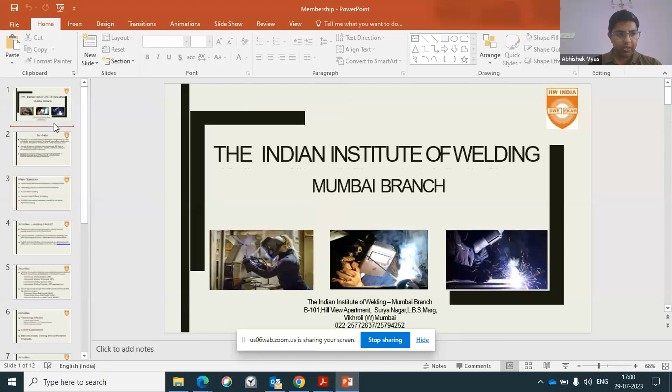Abhishek, now you are the host. Okay Abhishek, you are host now. After completion, hand over to Sanjay. Okay, I'm just okay. Just give me a minute. I hope you can see the screen, Sachin. Yes, we can see you. The slideshow mode, yeah.

Okay, so a warm good evening to all of you, all the participants and everyone joining us today for this webinar, Weld Tech Talk. I am Abhishek Vyas. I am representing as the Honorary Secretary of the IIW Mumbai branch.

I will just take you a little bit about the Indian Institute of Welding as a whole and what about the Mumbai branch activities. As you may be attending this series of Weld Tech Talk, it's part of IIW Mumbai branch, whereas IIW Mumbai branch is an affiliated branch to the Indian Institute of Welding, which was found at Kolkata, incorporated in Kolkata in the year 1966, having 4,500 plus member strength, and is a member society to the International Institute of Welding.

The major objectives of IIW are to assist human resource development in welding, technology diffusion, technology sharing with regards to industry knowledge and know-how about welding, foster research and development in the welding sector, promote health and safety in welding, and establish international standards of quality for the Indian fabrication industry.

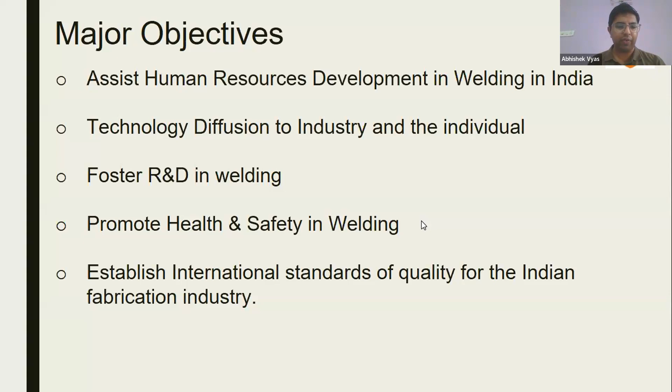We do conduct a lot of activities like conducting technical meetings, workshops, various training programs. Like one of these is what you are attending, webinars, conferences, international conferences. One of those conferences, I'll brief you very shortly about after the slides.

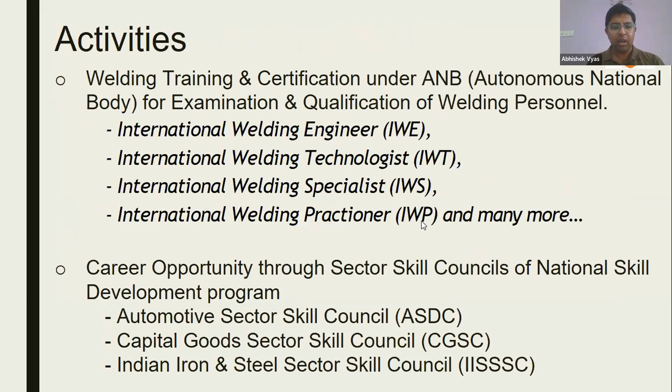We also have the Indian Welding Journal publication, which gets published every quarter in collaboration with AWS, and you can find all those details on our website as well. We also cater welding training and certifications like IWE, IWT, IWS, and so on and so forth. We also promote the skill council; we work with them for the skill development of welders.

We also conduct the National Welder Training Certificates and competitions for them. We help manufacturers and industries with certification schemes as per the requirements of ISO 3834. We also train the trainers, organize industrial visits, welder competitions for male and female both, and many more activities.

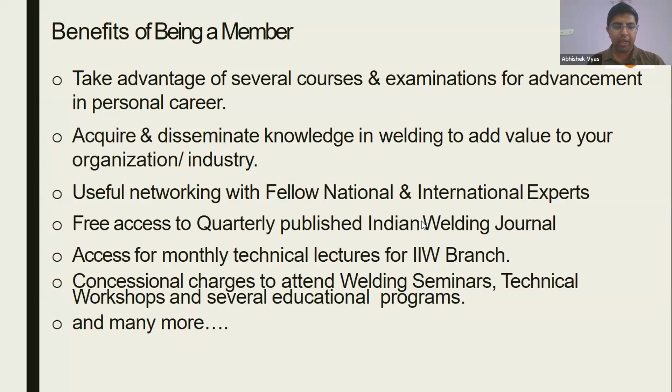These are the various benefits of becoming an individual member of IIW. You can take advantage of several courses and examinations at a discounted rate. You can acquire and disseminate welding knowledge, and get a platform to show your expertise. You also get free access to quarterly published journals and monthly technical lectures from various branches, connecting you with many more benefits as an IIW member.

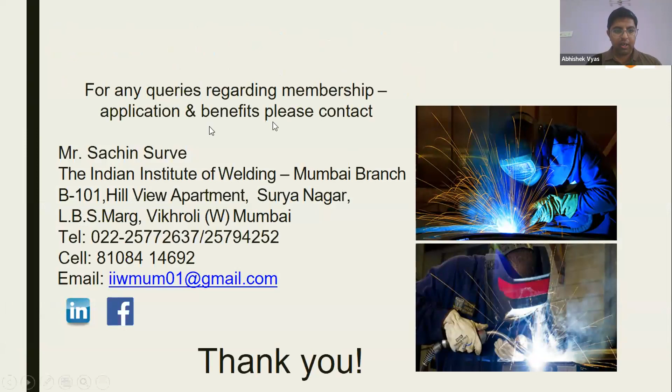I will quickly take you through the IC 2024 event, the 6th International Congress, going to be held in January 2024, between 22 to 24 January. The theme is advancement through sustainable and green welding. It will also have Weld Expo, an exhibition for welding, cutting and joining, held at the Bangalore International Exhibition Center.

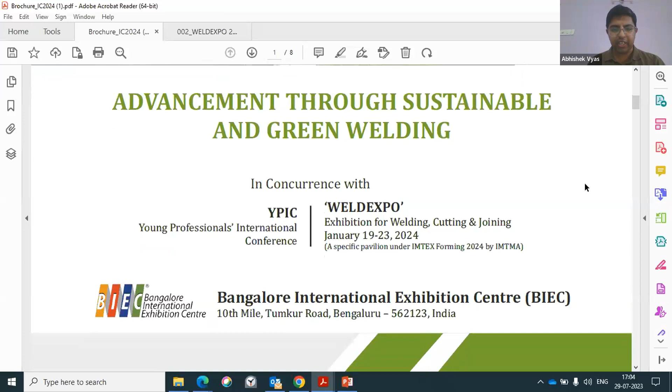It is in concurrence with IMTEX, which you may be aware is the biggest engineering expo in India. We would like to promote this event to all the participants listening right now, so that we can help you participate in this IC 2024 event.

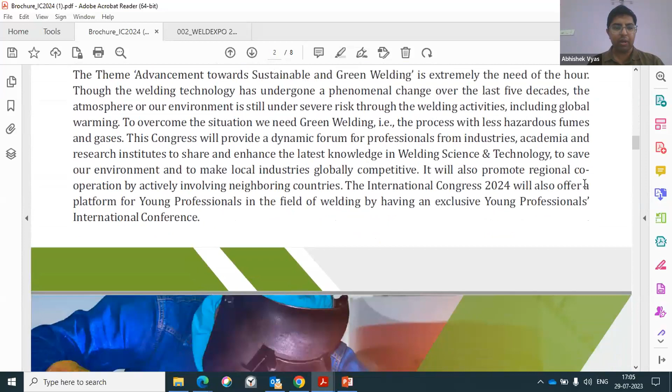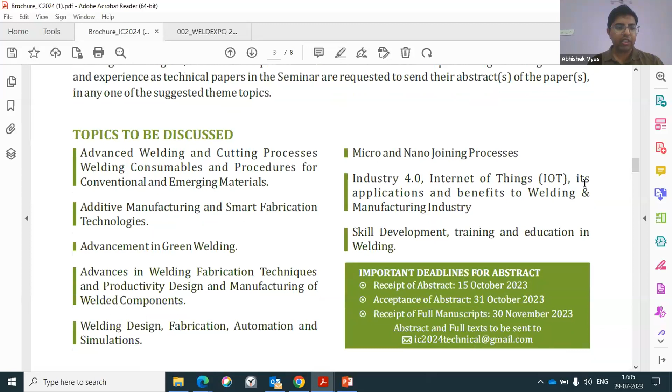These details are also available on the IIW website, which I'm scrolling through for all of you. We are inviting all authors to present their research work. Topics include advanced manufacturing, welding and cutting processes, additive manufacturing, advancement in green welding, Industry 4.0, Internet of Things, and many more developments occurring across the field.

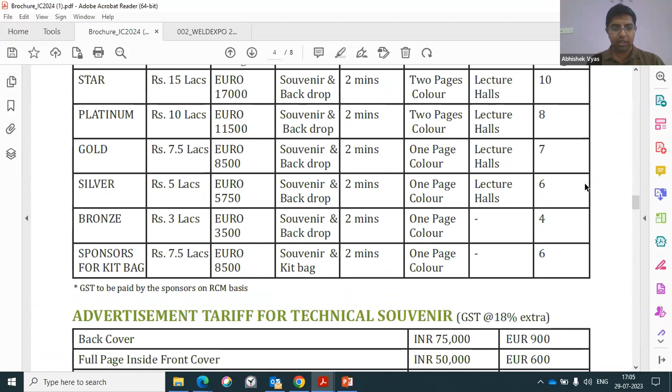15th October is the deadline for receipt of various abstracts. These are the delegate fees, just for your reference. You can find all these details on our website. If you wish to sponsor, there are certain details also available, and these are the committee members for that.

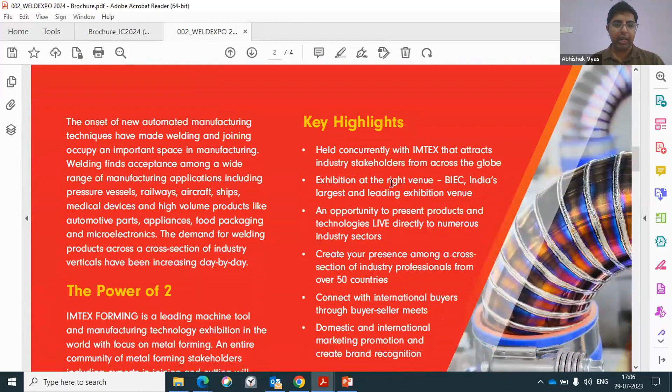We would also like to brief you about the Weld Expo, which is going to be held between 19 to 23 January, along with IMTEX, in Bangalore. So both these events will run at the same time: 22 to 24, the conference will be there, and 19 to 23, there will be this exciting welding expo held in Bangalore in the month of January 2024.

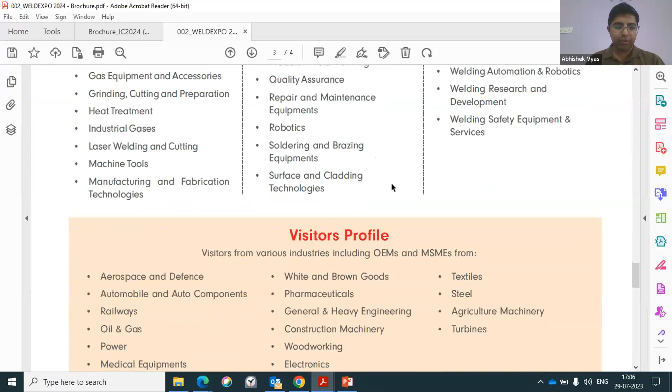Sanjay, are you there? Yes, Abhishek. Give me a minute. I'll try to give you the host access, just give me a minute. Sanjay, can you have the screen sharing access? Yes, I have it. Okay, yeah.

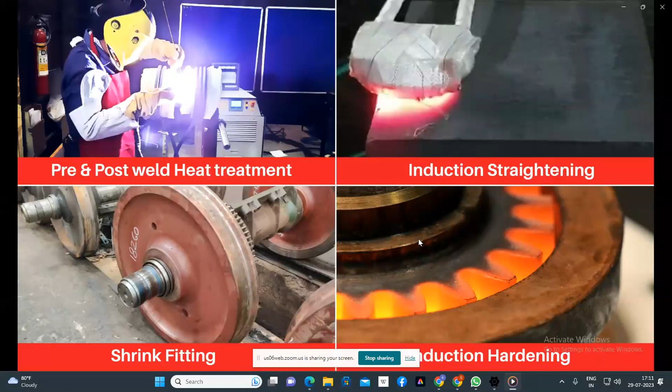Thank you, Mr. Abhishek, and thank you, Sachin Sanjay, for giving the opportunity. Thank you, Sanjay, for the video details. Juerg would like to take the session now, we would like to hand it over to you. Sachin, can you make him the host now? I will make Juerg host. Very interesting, I will see Sigma at the exhibition next week, I will definitely come see you at the booth. Great, I will be there as well.

So let's see if I can share my screen. Nope, still not possible. Abhishek, you will have to make Juerg the host for that. I think Sachin will do that, Sachin is anyways doing that.

Just a minute, I'm doing it. Yes, sure Sachin. Good evening Juerg, I'll be meeting you in Delhi maybe on the 3rd at the show. Let's do that, absolutely, it's been a long time.

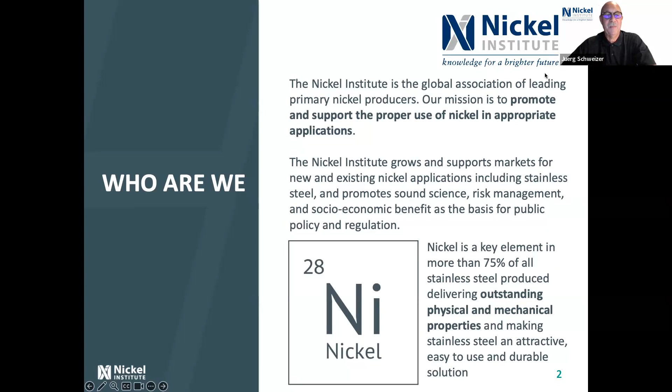Our headquarters is in Toronto, Canada, where Gary lives. We have an office in Washington and Durham, North Carolina, the US, and there is actually our science and research center. The European Center of Excellence of the Nickel Institute sits in Brussels. And there are two more incorporated offices, one in China and one in Japan.

Then we have two representative offices, one located in Australia, the other in Singapore, where I'm sitting. This is an overview of our members that actually fund our organization and, at the end of the day, these events.

IMOA is like the Nickel Institute, it's a non-profit organization. It represents the majority of the molybdenum industry globally, and it promotes the properties and sustainable benefits of molybdenum in all applications. Molybdenum is a key alloying element that provides improved corrosion resistance.

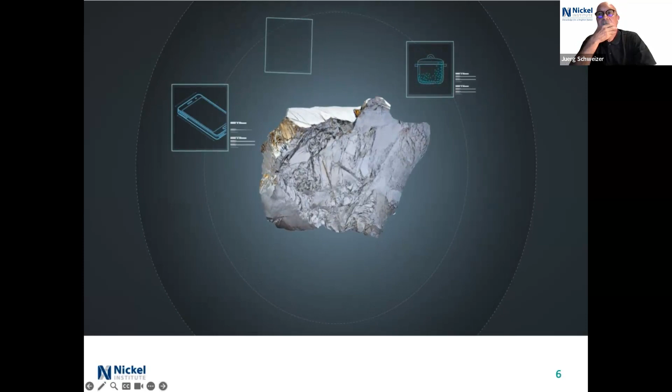Now a short video. Nickel is a naturally occurring element, it's a metal with outstanding physical and chemical properties. These properties make nickel inevitable in our daily life, notably in stainless steel, in pots and pans, in cutlery, in mobile phones, in computers. We see nickel playing an increasing role in emerging and future technologies, such as EV batteries or renewable power generation.

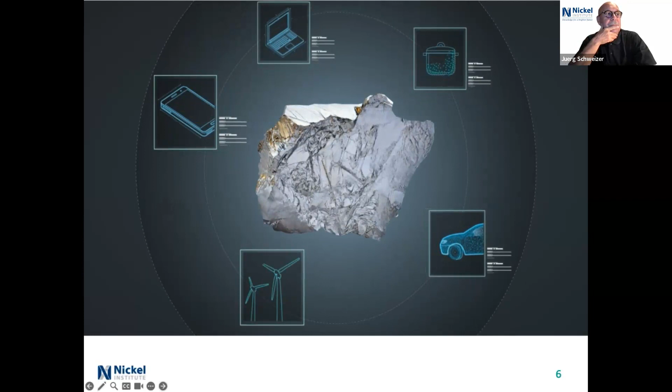Criticality usually assesses on one side supply risk, and on the other side the economic importance that a raw material plays, and that criticality assessment varies from region to region. What these assessments all have in common is that they identify a very high economic importance that nickel plays in emerging and future technologies, such as clean energy provision or green mobility. Therefore we consider nickel to be a strategically important raw material with a high economic importance.

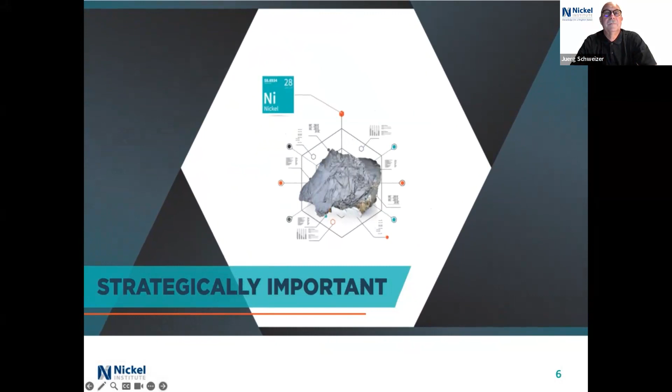When people talk about availability of nickel, they often use the terms resources and reserves, and it is important to understand what they mean. Resources describe potential future ore deposits where exploration still needs to be done. On the other hand, we have reserves where exploration was already done and where we know that these ore deposits can be mined in an economically viable way.

Today, there are 90 million tons of nickel reserves known, as well as 300 million tons of nickel resources. Companies are continuously adding new ore deposits to both the resources and the reserves. At current production levels of 2.5 million tons per year, we can say that there is enough nickel for current and future generations.

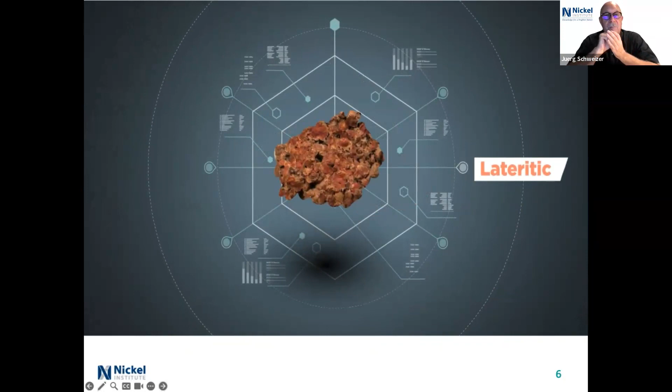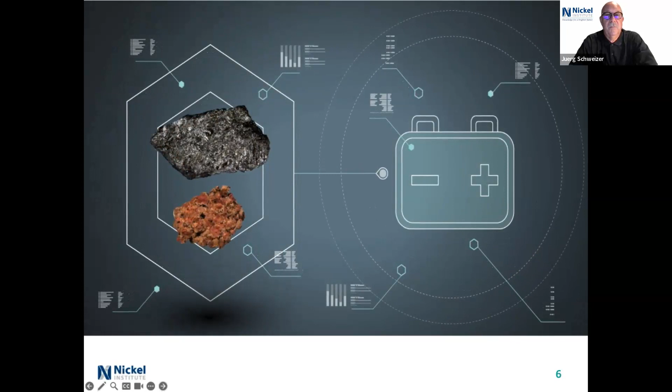There are two main types of nickel ores. On the one side, sulfidic ores, and on the other side, lateritic ores. And they are converted into a wide range of different nickel products. There's a common misconception that only sulfidic ores are suitable for batteries, an increasingly important application of nickel. This is not true. Both ores can and are already converted into the nickel qualities suitable for batteries.

Nickel is not consumed as oil or gas, it is used. Nickel can be infinitely recycled, and recycled nickel has the same properties as nickel coming from primary sources. 85% of all nickel that leaves the use phase is recycled. More than 80% of all nickel that historically was mined is still in use, meaning that it is available in future to help satisfy the growing demand.

It takes a mining company more than a decade between exploration and the production of its first ton of nickel. For recyclers, also significant investments are required before they can start producing nickel from recycling. What both have in common is that they require a stable regulatory framework, which is providing them with long-term planning security, and this will allow nickel to play its critical role in the future.

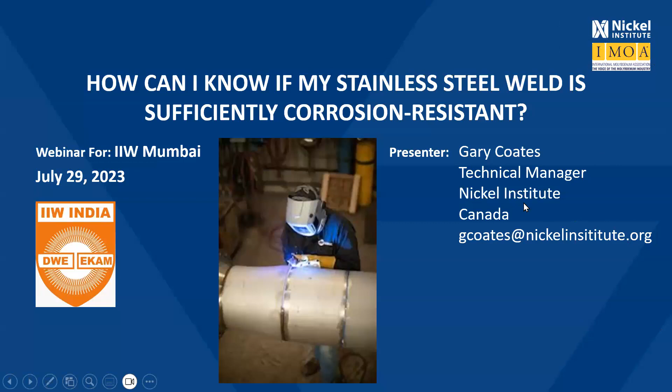Okay, great. So my talk today relates to whether you can know whether that stainless steel weld that you had just made is sufficiently corrosion resistant. So I have a short introduction. I'm going to talk about two major areas. We call them physical issues and metallurgical issues, and then a summary.

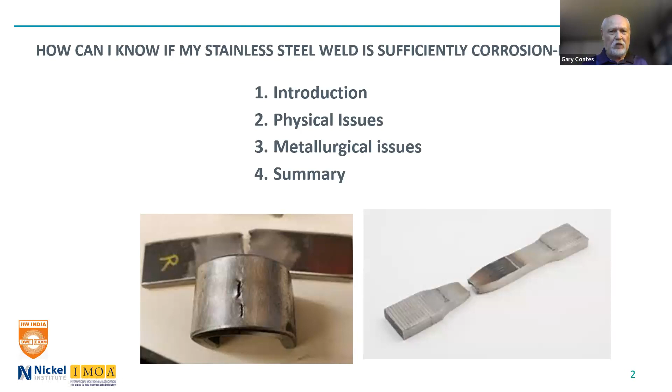And of course, one has to get into one's head the fact that most welders and even many welding engineers think that if they can pass a bend test and a tensile test, then their weld is fine. And that is largely true with carbon and alloy steels, but with stainless steels, corrosion resistance is very important. So stainless steels are used primarily for either their corrosion resistance or for high temperature, where strength at the high temperature and resistance to oxidation or carburization or sulfidation, etc., are required.

So I'm only going to talk about aqueous corrosion resistance here and how it is affected by welding, both by improper welding techniques and even if normal proper techniques and procedures are followed. So I'm going to give you also tips on how to ensure weldments. And by weldments, I use that term to mean both the weld itself and the heat affected zone, and you want them to be equal to or better than the base material.

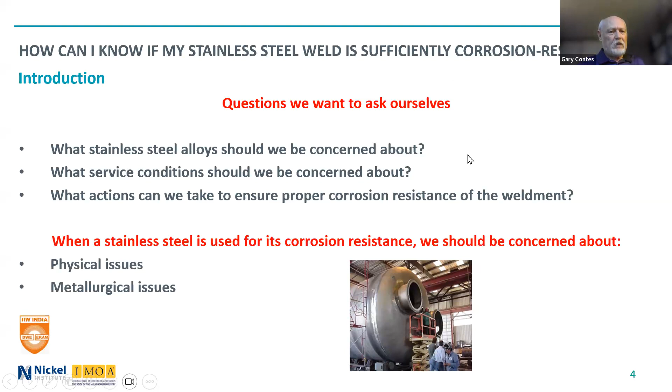So questions we want to ask: what stainless steel alloy should we be concerned about? What service conditions we could be concerned about, because we don't need to look at everything in terms of, well, everything is going to be bad in certain instances, and what actions we can take to ensure proper corrosion resistance of the welds. And as I mentioned, we're going to talk about physical issues and metallurgical issues.

So some of these physical issues, for example, I went to a plant, a pulp and paper mill. They had sodium chlorate solution in a pipe at 30 degrees C max. That's normally handled in 316L. We know that pitting and crevice corrosion can occur on 304L, or if the solution is overheated on 316L, but normally 316L is perfect.

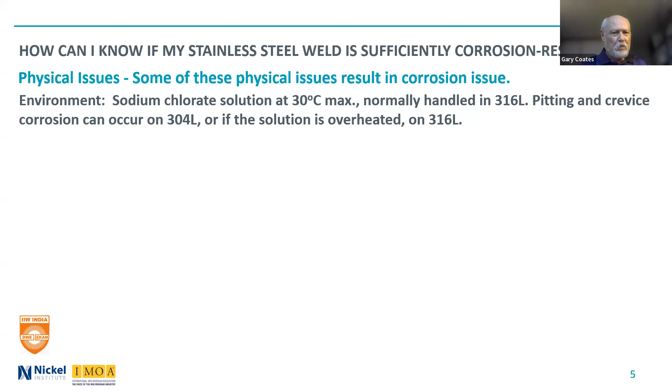And the engineer, who was not a weld engineer, handed me this piece of pipe. It was actually the full 1 meter long pipe at this point, and said that there were holes in the pipe, and he blamed poor quality stainless steel. He thought the weld was perfect because the weld did not corrode. But when we split the pipe in half, you could see exactly what the problem was.

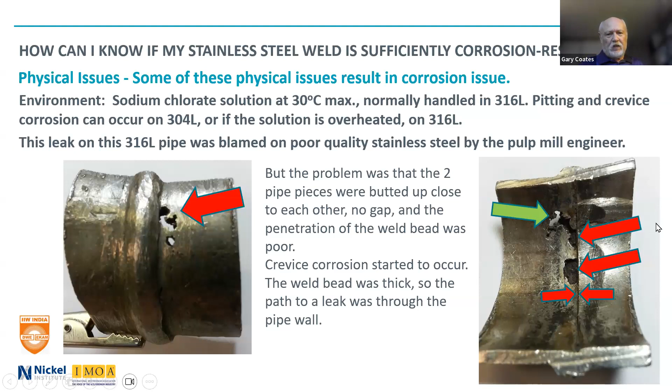The two pieces of pipe were butted up to each other. There was no gap there. The welder put a bead really on top of the two pieces of pipe, and crevice corrosion started. And as I say, that particular environment, sodium chlorate, is known to cause crevice corrosion. However, because the weld bead was so thick, the path to the leak was through the pipe wall. So this is where the cause of the failure was welding and insufficient penetration. They did not have a full penetration weld.

And as we know, and I've probably said many times, sorry, I'm getting rid of something here, the depth of penetration for stainless steel is less than it is for mild steel, and it's even lower for nickel alloys. But in this particular case, the welder should have allowed a gap between the two pieces of pipe. He probably should have tacked it, which he didn't do, at least on the root side, and welded it. Now, the welder would have known he wasn't getting full penetration, but he may not have known that the joint would fail prematurely because of it.

And so a lot of it is communication between the welding engineer and the welder. And another way of getting at it is if there was a visual inspection of the inside of the pipe or radiography had been specified, of course, that would have been clearly obvious. So in general, for corrosion services, we do want full penetration welds. And I would say, doesn't matter where it is, insist on full penetration welds.

And in a similar manner, we don't want intermittent welds, because with intermittent welds, you also can get crevices created, and in many environments, crevice corrosion. Now, there are cases where intermittent welds are allowed or could be allowed, but you want to have it approved by the corrosion specialist who knows exactly what is in the solution and whether crevice corrosion is likely or not.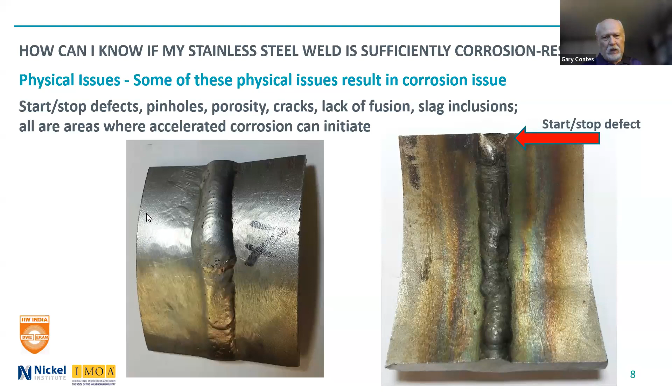And when you look on the inside too, you see all that heat tint, and I'll talk about heat tint in a moment, and that might raise a few concerns also, but only by looking at the inside of the pipe or radiography could you actually see the start-stop defect where corrosion started. And that's just a cross-section showing the amount of corrosion that has started there at the start-stop defect.

Also, it's important always to look at the inside of pipe some way, and of course things like rough surfaces or pinholes are bad, and in most cases that is really a rejectable defect that should be repaired. And again, the welder actually knows what it looks like on the inside. He's seeing whether he's getting gas evolution to get a pinhole or the rough surface because he perhaps hasn't purged it properly or whatever. He really knows that.

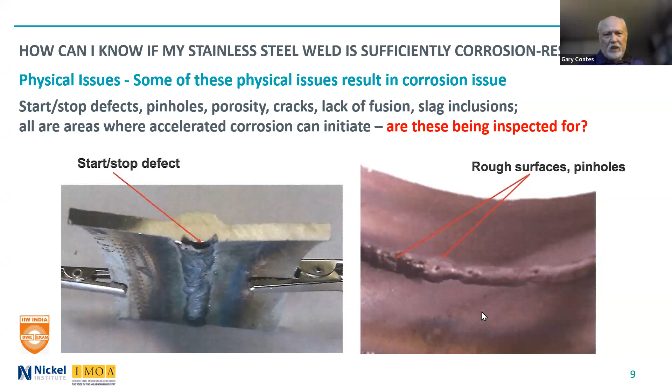But does he know that this is bad for the intended corrosion service? And he might just say, well, I passed my bend test, I passed a tensile test, it's fine. Well, he hasn't looked at corrosion, and we don't expect him to look at whether corrosion can be an issue.

Why is the passive layer important? Well, because it is enriched in chromium as an oxide compared to the parent material, the base material, and it's depleted in iron, so lower iron content. So it actually has, let's say, a higher corrosion resistance than the base material itself.

So if it's scratched in air or in water, the chromium will pick up oxygen from either the air or even from the water and will quickly reform with an inverse exponential growth curve. It happens fairly quickly for the first hour or two. It might take 24 hours to get the final amount, but it's only a small incremental amount after the first couple of hours.

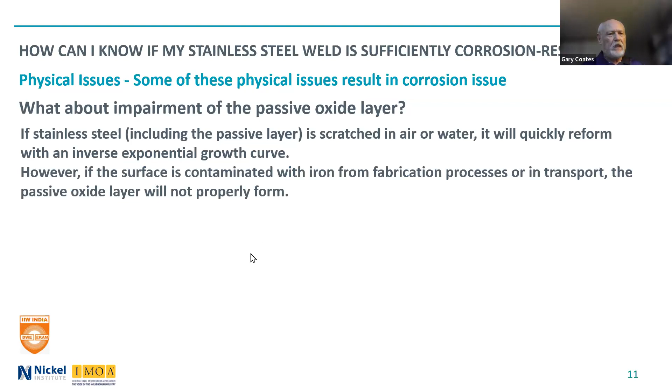Now, if the surface is contaminated with iron during a fabrication process or in transport, the passive oxide layer will not properly form because it has iron on the surface. And this iron contamination only becomes visible when it is wetted and the iron actually rusts. Prior to that point, it's really in the metallic form, and it looks for the most part like stainless steel, but you might see a scratch or something where there could be contamination. And so only when it is wetted and the iron rusts, you get iron oxide, and that is highly visible.

So there are corrosion consequences as well as aesthetic ones. And actually, for most people, aesthetic can be as important as corrosion because you want your fabrication to look good. And so, if you're a fabricator, you don't want to send a piece of equipment that gets to the site of your customer and it has all sorts of rust marks on the stainless steel. He's going to raise questions about the quality of stainless steel that you used, or how good a fabricator you are.

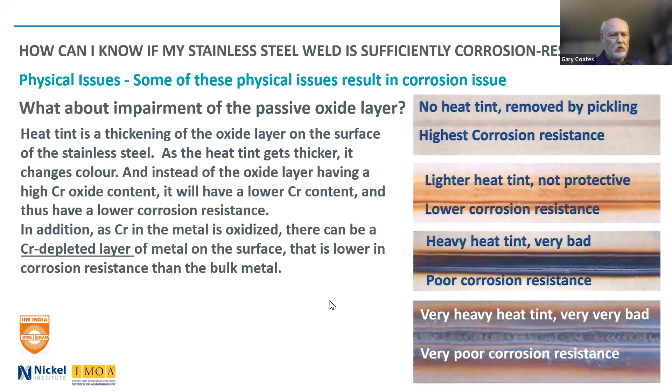Now, in addition, as the chromium in the metal is oxidized during the welding process in the heat affected zone, there can be a chromium depleted layer of metal on the surface that is, again, lower in corrosion resistance than the bulk metal. This chromium depleted layer is not visible, because it is solid metal. And if you just remove the discoloration, you have not removed the chromium depleted layer. Now, in many cases, that may not be a huge issue, but in certain cases, it can be a very, very important issue, and you will have to remove also the chromium depleted layer.

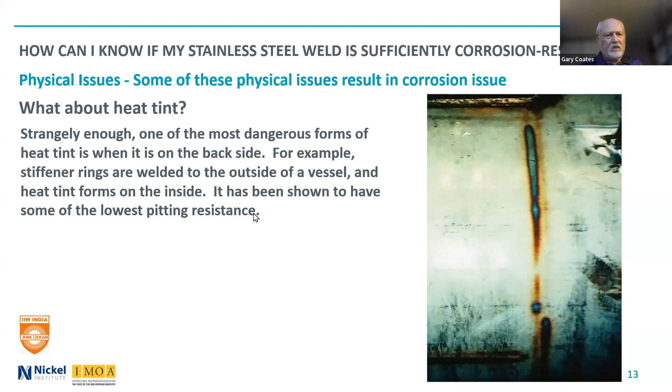Is heat tint always bad? Well, that's a good question. Let's talk about the formation of heat tint. With gas tungsten arc welding or TIG welding, usually the torch gas is 100% argon, especially if you have a gas lens so the flow of the argon is not turbulent.

You should only get a very light heat tint. The backing gas, most often 100% argon. Sometimes for critical applications, it can have a little bit of hydrogen in it, and that is perfect. But purging a pipe is really, I call it half art, half science, because getting the oxygen content right in the purge behind it in the pipe is really tricky. It's time consuming and costly.

Nitrogen can also be used as a backing gas. However, it has to be high purity nitrogen. I've seen many cases where people just say, 'Oh, we've got nitrogen,' and they'll use something that's 99% nitrogen but has 1% other gases in there, including oxygen. So it's important to use a higher purity nitrogen if you use that as a backing gas.

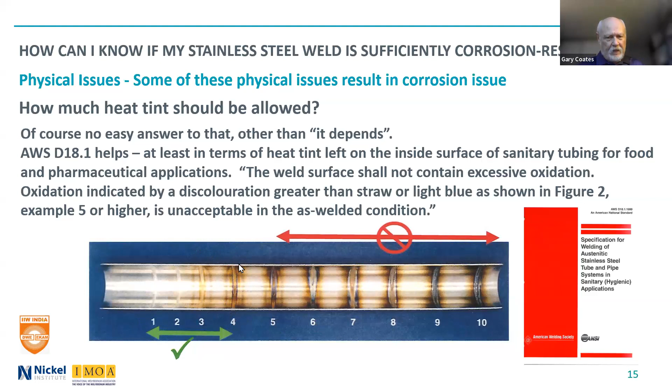5 and above to 10 is not acceptable. In other applications, you might accept a 5, for example, and this is assuming you don't do anything to remove that heat tint afterwards.

Do I need to remove heat tint and surface iron contamination? Well, first of all, let's look at what kind of environments we should be concerned with.

So the environment at the bottom of the pit is much more corrosive than the bulk environment in the solution. People ask, what ppm level of chloride should we worry about? We've seen it as low as maybe 10 or 20 parts per million, where if the chlorides can concentrate, usually through some sort of evaporation mechanism, that can cause the chlorides to rise to a much higher level. So from a point of view of concern, you have to start thinking about it at 10 to 20 parts per million. It may not be a concern depending on the alloy until you get much higher, but you have to at least think about it and eliminate it if possible.

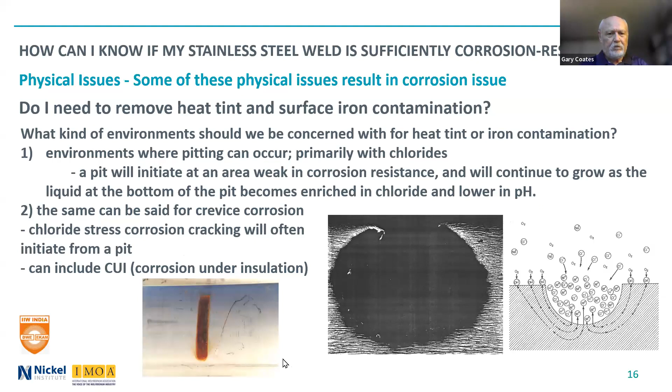Other environments are where contamination of the product is important. Certainly in the food and pharmaceutical industry, you don't want little bits of that oxide coming off floating around in your product. That would be a very bad thing. But it's not just those industries. There are certain chemicals which can be a problem.

Hydrogen peroxide, for example, if you have the heat tint, it will deteriorate. It will break up into water and oxygen. So the heat tint, the iron will act as a catalyst.

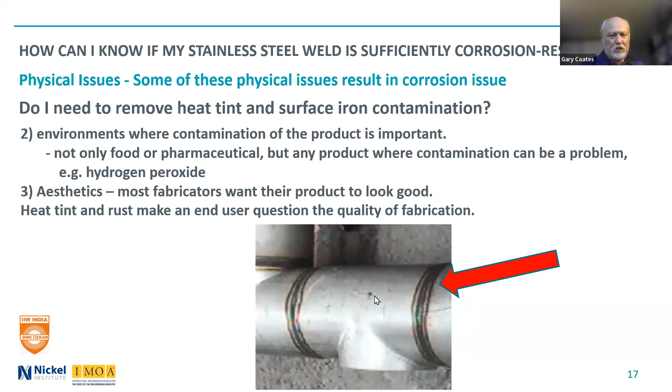And I go back to the aesthetics. Most fabricators want their product to look good. Doesn't have to look perfect, but want it to look good. And if you have heavy heat tint such as this on the outside of the pipe, maybe that won't have any effect in the particular environment it's exposed in. But if I see that, it raises a red flag for me: how good is the inside weld surface? How much heat tint is there? Does this fabricator really know what they're doing if they allow this to occur? If that heat tint had been removed, you probably wouldn't have thought about it, but by just shipping it, as I say, it may have no effect on the outside, but you certainly have concern for it on the inside.

So what should we do about surface iron contamination? Let's take that first. Well, first of all, you have to find it. As I mentioned, when it's just iron on the surface, you can't really distinguish it from the stainless steel, so it has to rust. You really have to find it first.

I like the idea, if you can, and it doesn't work in all cases, of hosing down the piece of equipment, assuming it's all stainless steel, throwing a plastic sheet over it and letting it sit. If you know it's going to rain, you can just put it outside and let it sit in the heat and humidity and in the rain, but you really have to get that surface iron to show itself through rusting to actually see what it is.

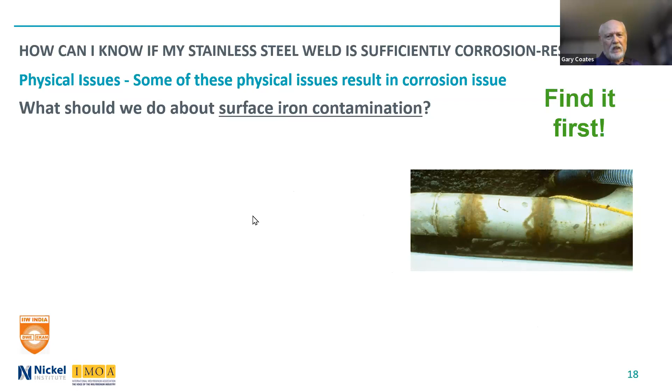Now, some people will use wire brushing or a flapper wheel or a grinding wheel to remove it. It's partially effective. It certainly removes the rust part of it, but does not necessarily remove the iron contamination that might have not started to rust yet.

Nitric acid, citric acid, they're used for passivation. They're not totally effective. They might remove some of the iron contamination, but we have done it ourselves on some pieces of equipment that have heavy iron contamination, and they are not effective that way.

So the more effective ways: there are some phosphoric acid cleaners that are pretty good. They might need repeated use. Ammoniated citric acid, again, that's one of those that removes light iron contamination better than pure citric acid, but doesn't remove the heavy iron contamination.

And despite the fact that pickling, whether pickling liquids or pastes, are very hazardous, and you need special equipment for the workers, they are really the best ones to use. They're nitric hydrofluoric acid-based chemicals. There's some newer, safer chemicals being tested now. A friend of mine is working on that, testing somebody's formulation, and we see that it works reasonably well on light iron contamination on 304, 316, but we're looking at it on other materials also, like the higher alloyed stainless steels.

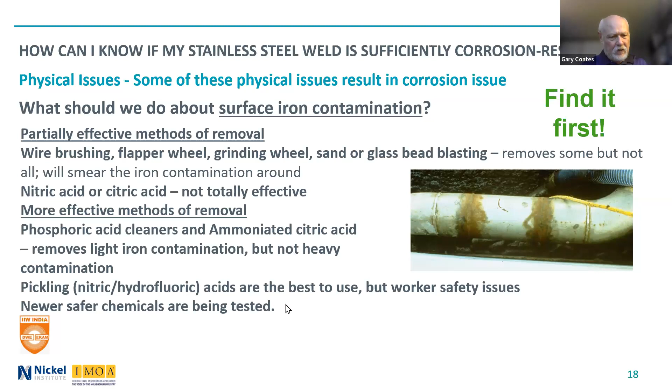So what should we do about heat tint? Well, you can actually remove the discoloration by wire brushing or a flapper wheel abrasive, but not necessarily the chromium depleted layer. A lot of people will glass bead or sandblast with a proper silica sand. It's more effective if done properly, not always easy to do around welds because you have a rough surface there.

Grinding will remove the chromium depleted layer, but it's hard to do at the fusion line unless you flatten out the entire weld bead on the exterior. And of course, if you use a rough grinding wheel to start with, you want to smooth it afterwards, because the higher the surface roughness, the more likely it will pit also.

And again, the nitric hydrofluoric acid mixtures are the most effective. And the pickling pastes are used for spot pickling. So if you just have a small amount of weld to do, you can just put on the pickling paste. You can also put it on iron contamination areas too, as pickling paste, and it works well.

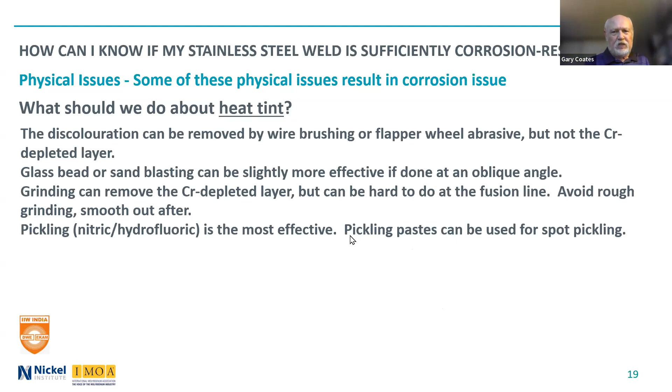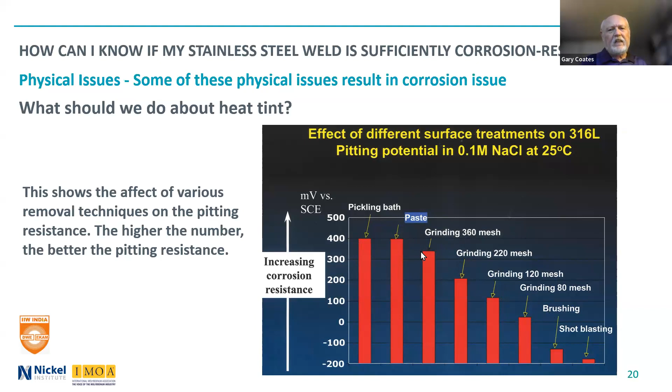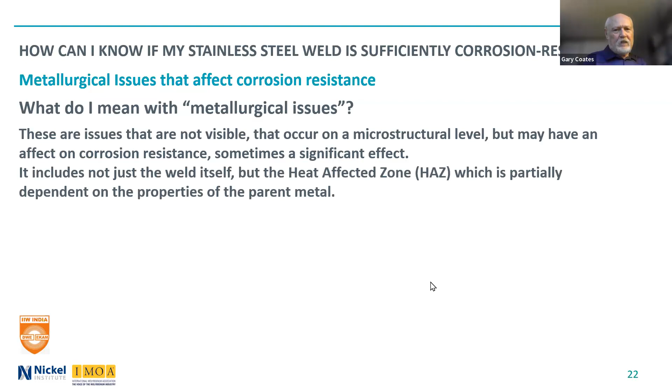And it includes not just the weld itself, but the heat affected zone. This is especially where it comes in, because with the heat of welding, you're affecting the heat affected zone, sometimes detrimentally, not always, but sometimes. And it is dependent on the properties of the parent material.

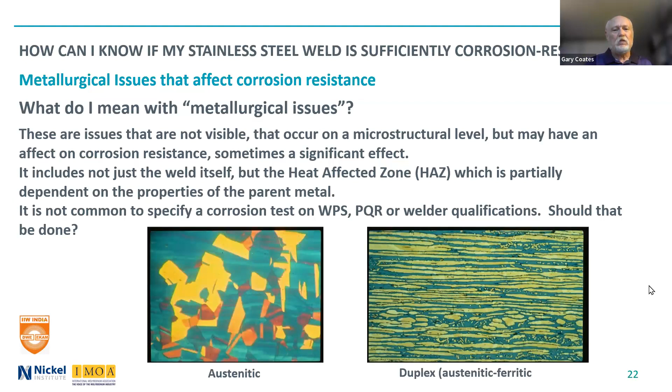So it's not common to specify a corrosion test on the welding procedure qualification or welder qualifications. People have asked many times, should that be done? And of course, the answer is always, it depends. So I'm going to talk about just two types of stainless steel, the most common ones used for corrosion service, the austenitic and the duplex.

So first of all, are weldments different metallurgically? And of course, the answer is yes. The weld metal has an as-cast structure versus the wrought structure of the parent material, which looks a lot different. It's been annealed, it's been worked so that the grains are completely different than the as-cast structure. And even a cast material, if you buy a cast valve or pump, that pump has been annealed afterwards.

So you do have a different structure when it's annealed, not the same as the wrought material, but a different one than the as-cast. There are high residual stresses in the weld metal. As the weld cools from a molten state, it actually shrinks and it pulls in the parent material.

You can get high stresses in the heat affected zone, as high as 100% of the yield strength. It actually can go above the yield strength and pull the material, and you can get very high residual stresses there. And this is where you have to be concerned about stress corrosion cracking and sulfide stress cracking.

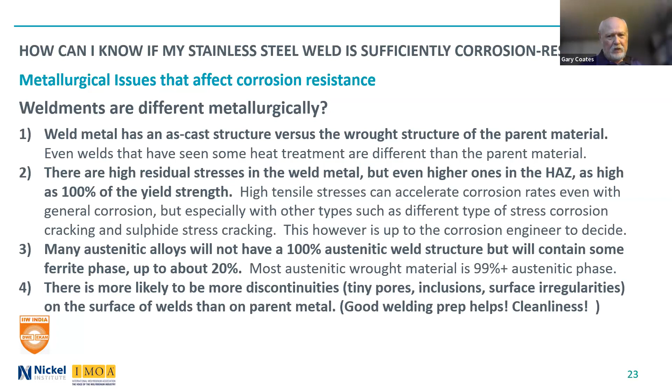Most of us in school or somewhere along the line have learned all about chromium carbide formation. Sensitization is another word for that, which affects intergranular corrosion primarily. Today, almost all wrought products are low carbon, less than 0.03% carbon. A few exceptions are bar, thin sheet, castings may not be. But plate products certified to 304 are most often dual certifiable as the L grade.

The exception, of course, is there is some plate certifiable as 304, 304H, H meaning it has a minimum of 0.04% carbon. And 316L—if you wanted to find 316 with more than 0.03 carbon, good luck. I won't say it doesn't exist, but you'll have to search long and hard all around the world to find it, especially in a plate product, a thicker product, or a pipe product.

Now, ASTM A480, which is one of the standards related to plate, sheet, and strip, has done away with doing the test for intergranular corrosion. It just says it should be capable of meeting it. The reason for that is that the standard intergranular corrosion test, the copper sulfate test, is so insensitive that it really is of no value.

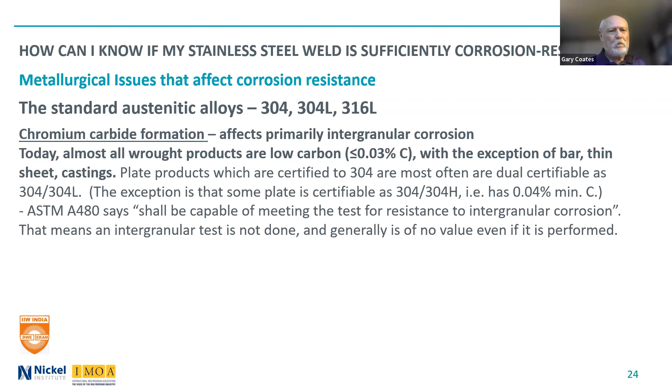But certain applications—and I take the example, which is the most common one I run across regularly—are for nitric acid service. When you're using 304L in nitric acid service, especially at higher concentrations like 65% and close to the boiling point, you can get sensitization even in the L grade. So they will specify the Huey test, ASTM 262 Practice C, on the parent material, because they want to ensure the parent material is fine. And if it can't pass that, there's no hope of doing a good weld on it.

So this is really a check of the quality of the heat treatment of the material, and perhaps a check that there are relatively low sulfur and phosphorus contents that will meet it. For weld metal, a lot of the same companies that want it on the parent material will ask for it to be done on weld samples that you provide. Again, it's not going to be, for the most part, the weld that fails—it's going to be the heat affected zone that suffers any corrosion, if anything.

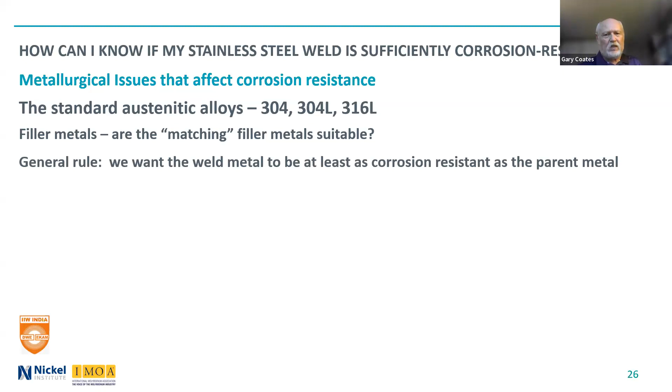So let's talk about the standard austenitic alloys: 304, 304L, 316L. Are the matching filler metals suitable? First of all, as a general rule, we want the weld metal to be at least as corrosion resistant as the parent material. Why is that?

Well, the old galvanic or dissimilar metal effect—if the weld metal, which is a small area, is less corrosion resistant and starts to corrode while the parent material does not, we have the bad situation of small anode, large cathode. So you have a galvanic effect, or at least the potential for one.

If the weld is more corrosion resistant than the parent material, and the parent material starts to corrode, then we have the good situation of large anode, small cathode, and no galvanic effect.

So we want the weld metal to be at least as corrosion resistant as the parent material. And so I'm showing here in the table the 304L plate at the top. It has 18 to 20% chromium. The filler metal, and I took the example of the wire here, has a higher chromium content. So even if you lose some chromium across the arc, it oxidizes perhaps a bit, you will have a weld metal that is slightly higher in chromium content than the base metal.

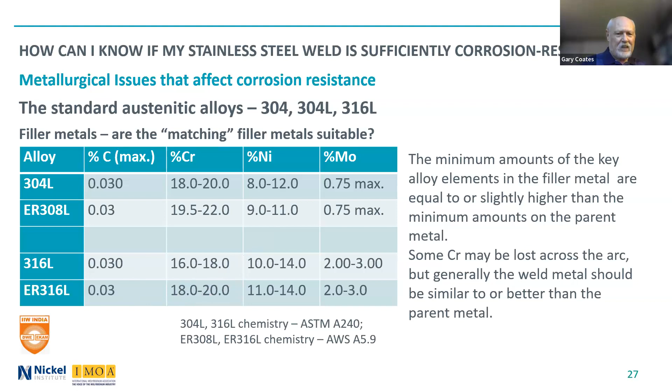The nickel content is in the middle. It's less important from a corrosion point of view. And 316L plate versus 316L bare wire. Again, you can see the chromium content, which is the element most likely to be lost in a weld, is higher than the parent material. And so therefore, yes, the matching filler metals, they're not actually matching, they're slightly over alloyed. They are suitable in most cases.

What about ferrite content? Well, as mentioned, those alloys, 308L, 316L, the composition of the filler metal is balanced to give some ferrite in the as-deposited weld metal, and a small amount of ferrite prevents hot cracking, which can occur when that weld metal solidifies, especially as austenite. And in most cases, up to 10, even 12% ferrite is not detrimental to the corrosion performance of the alloy. But like all things in life, there are exceptions.

For example, in urea plants, there's a part of the plant that sees ammonium carbamate, and that is sensitive to ferrite, will cause the weld to corrode. At high temperature service, this is not necessarily corrosion. The ferrite will embrittle, so it can cause embrittlement, which is a problem when you have a higher ferrite content, maybe 12, 14%. It reduces cryogenic toughness. The weld becomes slightly more brittle, not a huge amount, but it can affect that.

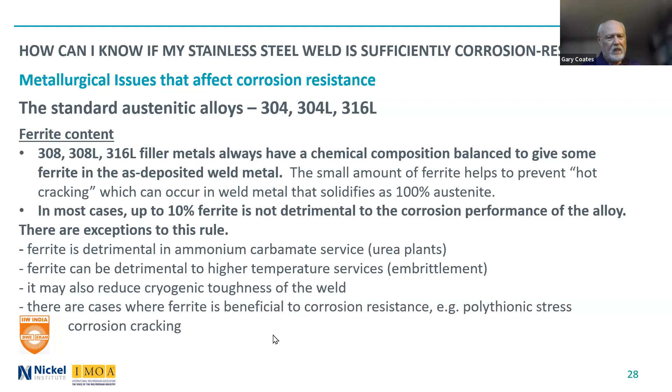And one should remember there are cases where ferrite is beneficial to corrosion resistance, and the most common one that I run across is polythionic stress corrosion cracking, where ferrite will help to prevent that stress corrosion cracking from occurring, whereas the wrought material that has 99% plus austenite in it will crack.

So 304L, 316L, I call them forgiving alloys. So generally there's no issue. We mentioned perhaps some cases like boiling 65% nitric acid, there is a problem. And the problem is more with the parent material than the weld material, but you usually test a weld because the heat affected zone will have a poor corrosion resistance, but generally, if the parent material is heat treated properly and is the right composition, it will not fail the test. And then there are some cases we mentioned earlier where it is important.

There are some cases where you may want to use a slightly higher corrosion-resistant filler metal for a particular service. It might especially be when you're doing repair welds. You might want to use on 316L a filler metal with 2.5% min moly rather than the 2.0, which you are almost guaranteed to get in the parent material.

I've been involved in pulp and paper mills that will use 317L, which is very similar to 316L but has 1% more minimum molybdenum in it, or even the 309LMo filler metal, which has a higher chromium, same moly content as 316L. Those are all suitable for welding 316L, where you're really concerned that you want the weld to be higher corrosion resistant.

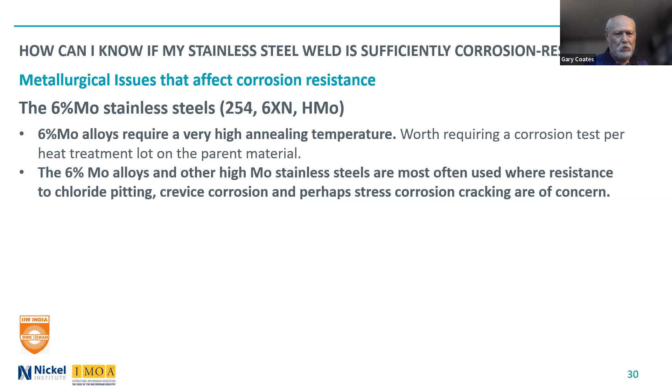They're used in more severe environments. And so those defects that we talked about in the physical part are all extremely important. Now, all these 6 moly stainless steels are welded with an overalloyed nickel-based filler metal of the 625 type or the C type, and there are variations on the C type. All of these have much higher molybdenum content and nickel content than the parent material. They have proven to be the proper ones to use for welding.

However, sometimes there's a little problem with thinking about them. The 6% moly alloys are stainless steels, but they're being welded with a nickel-based filler metal. They have 0% ferrite in the weld, thus very sensitive to hot cracking. Thus, you have to keep the heat inputs down low. These are micro cracks that may not be obvious to the welder while he's welding it. They may only open up 24 hours after he's welded it.

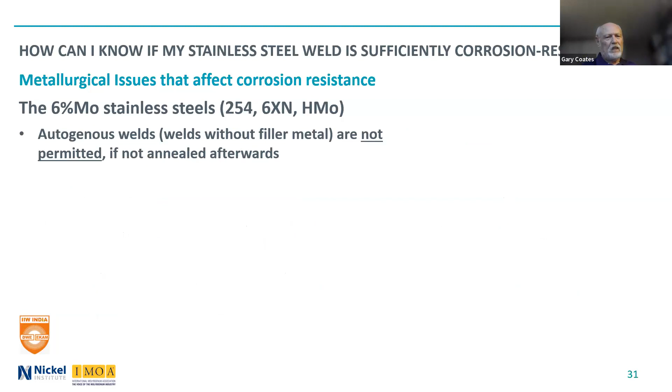Now, the real issue for welding is that if a welder is welding, let's say, a pipe joint, and he's adding filler metal to it, the joint closes up as he goes around. And so he doesn't have to add filler metal, or he doesn't have to add much filler metal. He really has to stop and open up the joint. You can't just have the filler metal in your hand. You've got to be adding, and you've got to be adding sufficient filler metal to it.

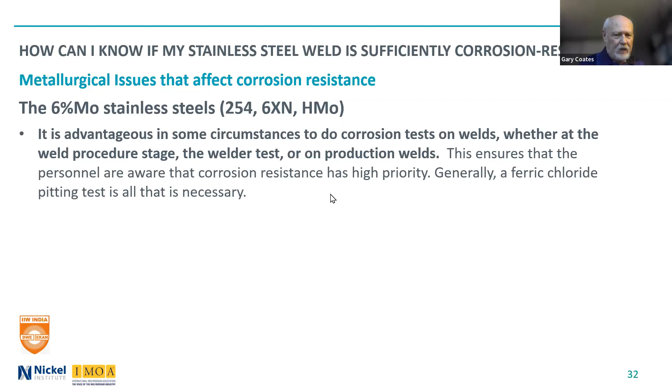So this is some training that the welder has to hear about, and it is possible to do corrosion tests on welds. And it's important to show it to the welder. If you do an autogenous weld and you see how bad it is, that visual image may be more important. And some companies will specify the corrosion test on the weld procedure test, on the welder test to show the welder, and on production welds, just to make sure that people are following the procedure. And generally it's a 24-hour ferric chloride test. 40 degrees C is the temperature for most of the 6 moly alloys.

I'm going to quickly move on to duplex, and they represent a whole new range of potential metallurgical issues. And there are some truisms I wanted to bring up here. Duplex alloys are the most cost-effective materials, and that's generally true. The cost of the parent materials is often lower, especially if their high strength can be used, but the fabrication costs generally are higher, and that message has to be put through to the people who are charging out this. You will need more tests, you have to do it differently, and generally the fabrication costs are higher.

Duplex alloy welding is not difficult, but is different, and I use that regularly myself. It does take a bit of a different mental approach, both for the welding engineer and for the welder himself. And when duplex alloys are good, they are very good, and when they are bad, they are very bad.

And that is a truism I also use regularly, and a good example of that, and I thought I had a picture here, well, we'll come back to that, because it is in the next couple of slides, I have an example of where that is the case.

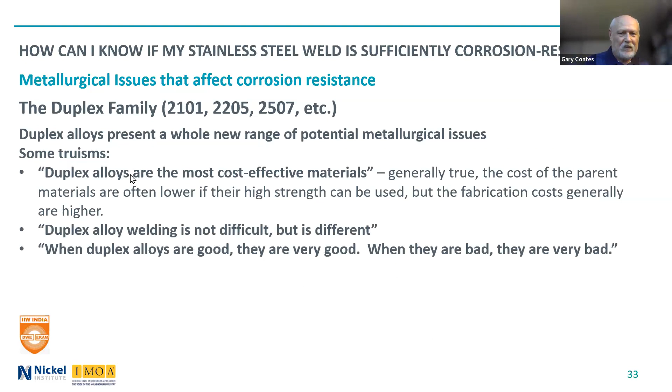So with duplex alloys, again, the proper heat treatment of the parent material is extremely important. If it's poorly heat treated, it may not be possible to weld it with good corrosion resistance in the weldment, in both the heat affected zone and the weld metal itself. And so therefore you need to do tests, and that's laid out in ASTM A923 for the duplex grades 2205 and higher, or A1084 for the lean duplexes. And that ensures that there's freedom from intermetallic phases in the parent material.

And in the oil and gas industry, they use the ISO 17781 specification, which is an excellent publication. And if you're doing a lot of duplex welding, I would recommend buying that, because it covers a lot of really good things there. So if the parent material is poor quality, there's nothing the welder can do to make it a good quality weld.

So, austenite ferrite balance, corrosion issues. There are tremendous corrosion issues if you end up with too high ferrite, as well as poor toughness. It becomes brittle at low temperature. This is the most common problem. We can do a whole webinar on duplex welding. I think I've actually done one for IIW, but it needs to be controlled by many factors.

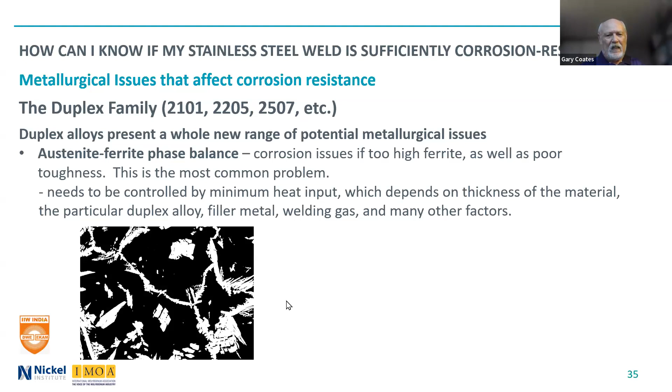There have been other fires at other refineries that have had the same issue, and people have been severely injured and even have been killed. So when duplex is good, it's very good. When it's bad, it can be very, very bad. So I'd like to show this, and I'll go through it very quickly about what happens, why it's important.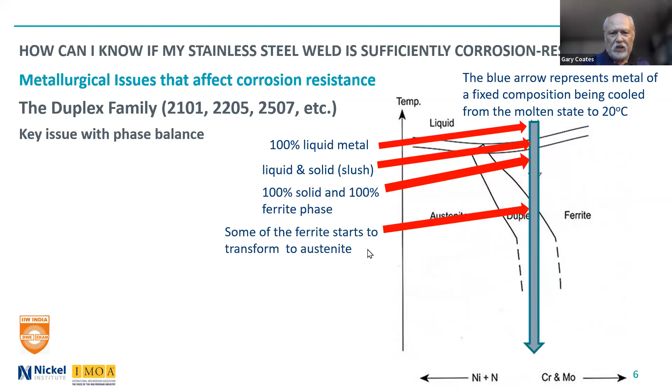And if it is cooling down slow enough, some of that ferrite starts to transform to austenite. And once you get to about 1,000 degrees C, if you've done it slow enough, you will have a structure close to the 50-50 austenite ferrite range that you want. Nitrogen aids in the speed of the transformation, which is why the nitrogen is extremely important in the duplex alloy. Nickel also does that.

But once you get below 1,000 degrees C, if you have too slow a cool, you can get intermetallic phases that form, and this is one of those things that is very difficult for welders to understand. So it's really something the welding engineer has to get through in his own head.

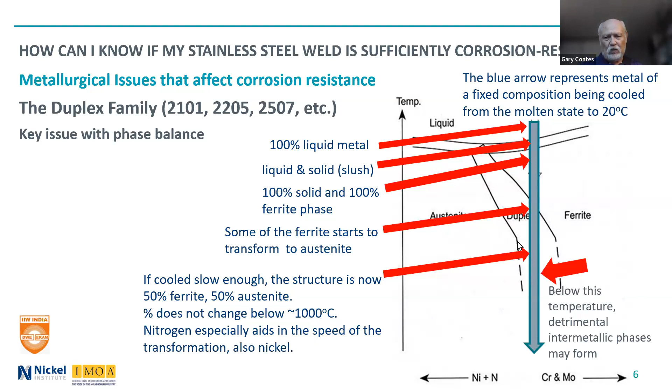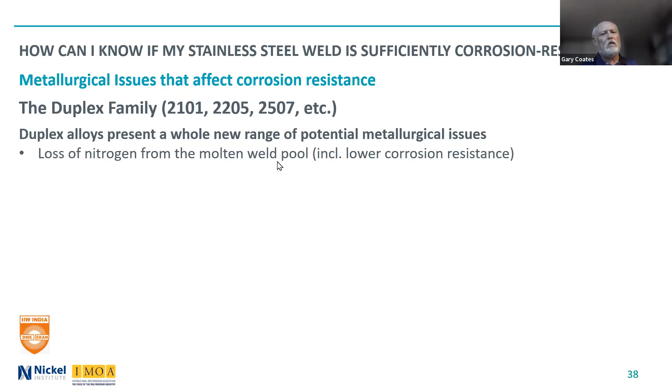So what are important in the welding? Well, loss of nitrogen from the molten weld pool. Nitrogen can come off, so you have it in the base material, it goes into the molten state, and some nitrogen can come off, and that can result in lower corrosion resistance and a poor phase balance.

Like the Sigma-forming alloys, we generally say no autogenous welds. They may be allowed under special circumstances, and unlike the 6% moly austenitic alloys, the reason is more the phase balance issue, not the intermetallic issue. There's a limited number of filler metals, and I'll come a bit more into that right now.

So that's where the S32205 comes in. It has higher minimum content, same maximum content, so they really fit into the same specifications. And really, most importantly, it's the nitrogen content is in the high end, because we said nitrogen aids in the transformation of ferrite to austenite as the weld metal cools.

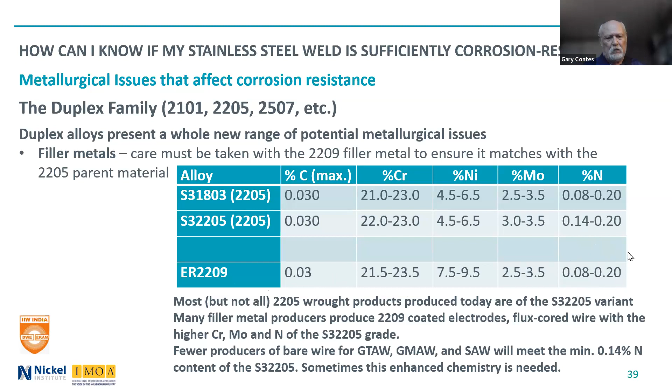And when it comes to bare wire, there are a number of producers that don't like the 0.14 minimum nitrogen content, and they need it lower because it makes it very difficult to produce for them, higher defect in the wire production, and so therefore they resist it. So many times you can get away with 0.13, 0.12% nitrogen, but there are cases you may want to insist on the 0.14 minimum nitrogen in the bare wire.

So testing requirements, there are a whole raft, there are many specifications. ISO specification talks about that for the welds. They should be specific to the application, to the alloy, to the thickness and welding processes. With many of the duplex alloys, corrosion testing as well as phase balance tests are necessary at many stages of qualification to make sure you have it right. I'm not going into all the details there, but basically there are so many cases where you need it.

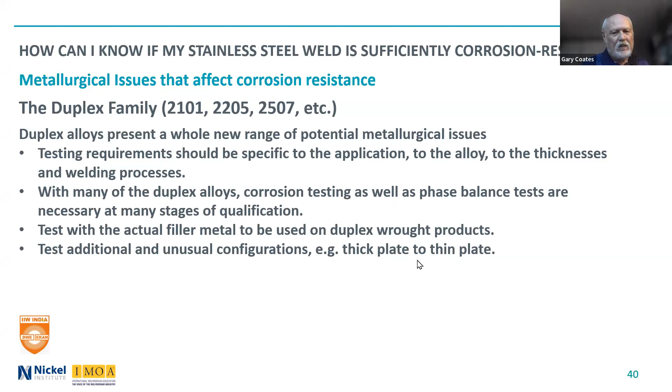Test with the actual filler metal to be used on duplex wrought products, and test additional and unusual configurations. And the most obvious one is when you're welding thick plate to thin plate, you can't have too high a heat input there or you'll burn through on the thin plate. You have to be very, very careful there.

So just in summary now, not every imperfection needs to be corrected, but it is important to know which ones are going to affect the corrosion performance, and that should be shared by the welding engineer with the welder so that he knows what is important. He often knows much better as he's welding it what is happening there. If he knows that it's bad, he might do something about it. And the heavy heat tint we've talked about is a sign of something going wrong, and certainly raises a big red flag for me.

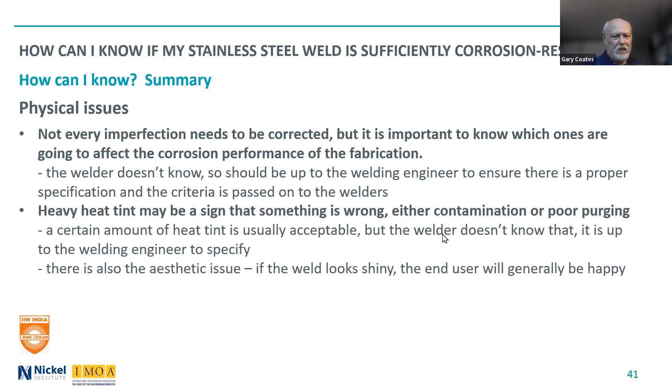With the standard alloys and the metallurgical issues, really there isn't a lot. Just we talked about nitric acid. We talked about a few cases where ferrite content may have an effect. And when it comes to repair welds, you as a welding engineer may have to assess the conditions to see whether you want to use that matching filler metal or perhaps a slightly over alloyed filler metal.

With the Sigma alloys, it's really up to the welding engineer to ensure that a proper specification exists and is followed: maximum heat input, proper filler metals, no autogenous welds. Heat tint should be removed, preferably by pickling, because it gets the chromium depleted zone.

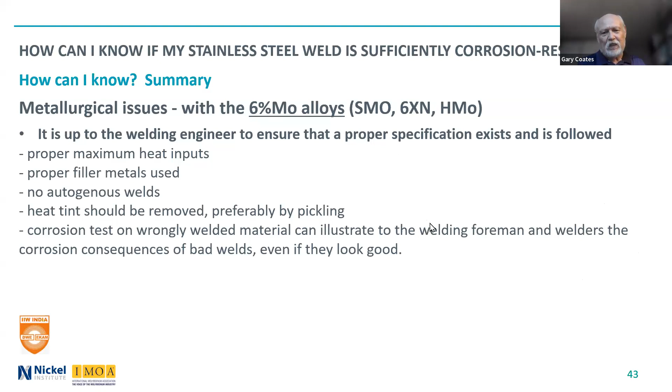Corrosion tests on wrongly welded material can illustrate to the welding foreman and welders the corrosion consequences. I've done that before. I've shown them a sample of an autogenous weld with huge pits in it from the test, and they are shocked in some ways and say, okay, I better not do it, even if it may take six months for it actually to show up in practice.

With the duplex alloys, it's a lot more difficult. I'm a big fan of duplex, don't get me wrong, they are wonderful alloys, but as a welding engineer you really have to take a much closer look at them. It's going to cost more to do the testing. You need to do special things that you aren't doing with the austenitic alloys. They are different, but not necessarily difficult.